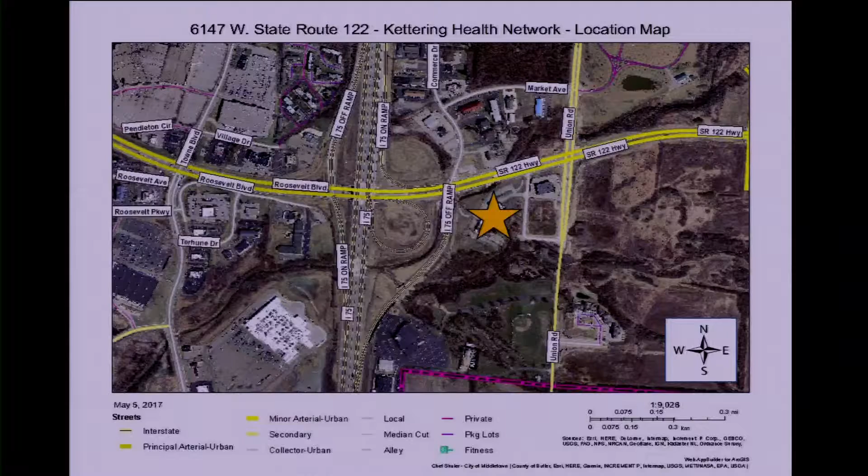Here's a location map. As you can see, the star indicates 6147 West State Route 122. The property, the site we're looking at tonight, is located in close proximity to a CVS, the new BP gas station, the billboard next to the highway, and Interstate I-75 and State Route 122. The property is located in the BCH Business District, surrounded by BCH to the east, again CVS, BCR Business Center Residential to the south, Grace Baptist Church, BCH Business Center to the west, Interstate I-75, and BCI Business Center Interstate to the north. BP gas station, again, is across State Route 122.

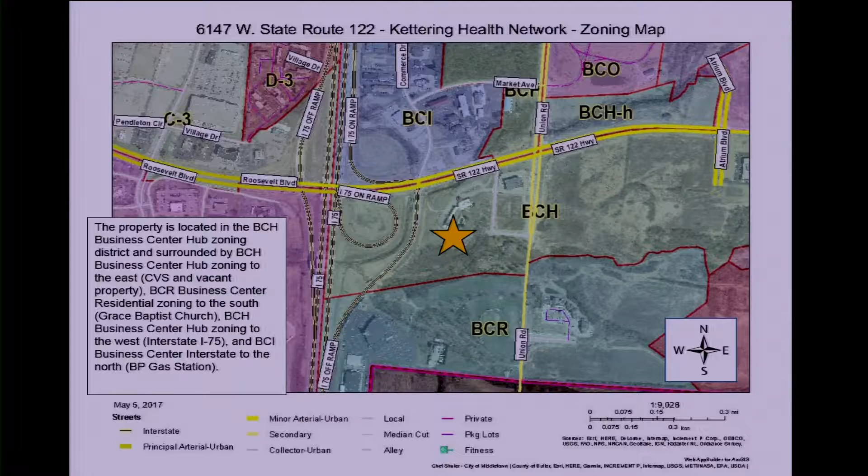Project background: the Kettering Health Network proposes to be up and running by 2018. The applicant is requesting approval of combined preliminary and final development plan. Per the applicant, the development is located on the southeast portion of the property, close to State Route 122 and the I-75 interchange, and requests the following variances due to these reasons.

First, access to the site and the existing CVS store is provided via an existing public road, specifically Union Road and an adjacent service road, and there are no current plans to modify the existing roadways. Second, existing creeks run along the site's northern and southern edges. Dick's Creek is adjacent to State Route 122, and there's another creek that runs along the southern edge. There's significant topography associated with both creeks along with the FEMA-regulated floodplain. As indicated on the development plan, the footprint of this project has been designed so there are no impacts to the existing creeks and associated floodplain.

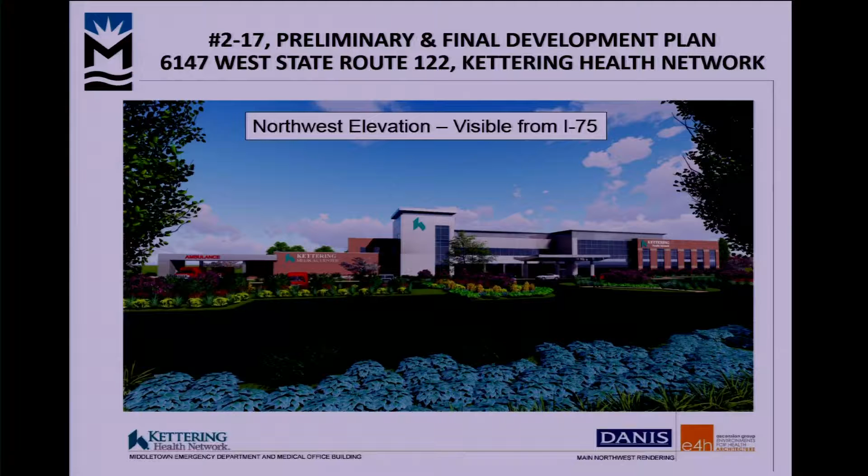Staff analysis: the Kettering Health Network facility proposes a 2-story tall building with a total of 65,000 square feet. The first floor will feature an outpatient emergency department clinic and imaging center, along with a medical office building for physicians. The second floor is planned as a holding place for future growth of the facility.

The plan also proposes a single-story, 300 square foot utility structure, a helipad for evacuation of patients needing higher levels of acute care, and a loading zone behind the building, landscaped by a berm to provide screening from the east.

The proposed use of a health care clinic is principally permitted in the BCH zoning district. Per the planning and zoning ordinance, a clinic is defined as a building used for care, diagnosis, and treatment of sick, ailing, infirm, or injured persons in need of medical or minor surgical attention, but who are not provided with room or board or kept overnight on the premises.

The primary building materials are masonry, glazing, and architectural composite materials. The primary building elevation meets the zoning code requirements for facade transparency and ground floor transparency. The glazing used on the facility will meet the planning and zoning ordinance for 30% transparency.

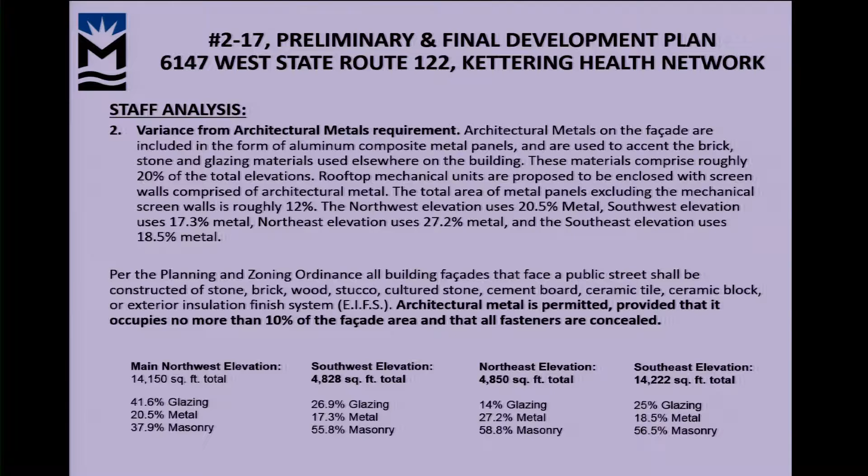Here are the proposed elevations from each side of the building.

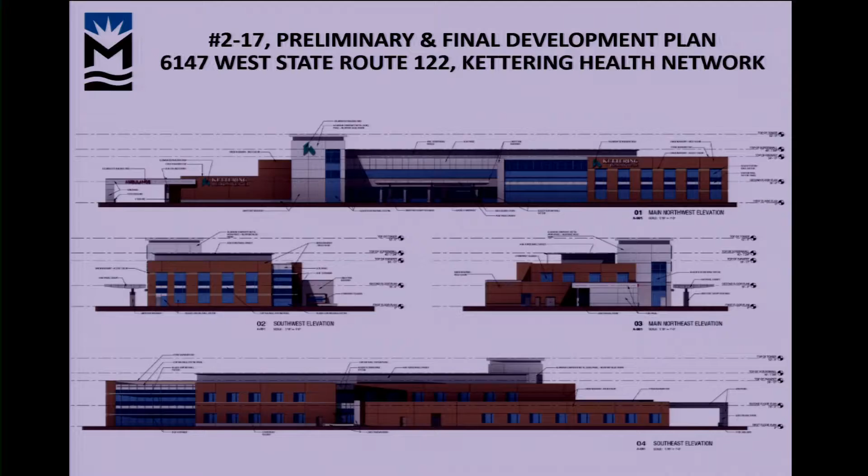Third, sign height and size variance. Due to the proximity of the site to Interstate 75 and State Route 122, and the emergency function of the facility, the applicant is proposing an increase to the allowable number, area, and height of the site signage. There will be 5 signs proposed: 2 ground-mounted signs, one located adjacent to the Kettering Health-owned network along Union Road, which I'll show on a map. They own another parcel that's not part of this proposal. There will also be 2 large highway signs and a ground-mounted sign northeast of the property, which I'll also show. The Planning and Zoning Ordinance for BCH zoning districts allows, for a building of 2 non-residential uses, a maximum permitted area of 40 square feet and a maximum height of 5 feet.

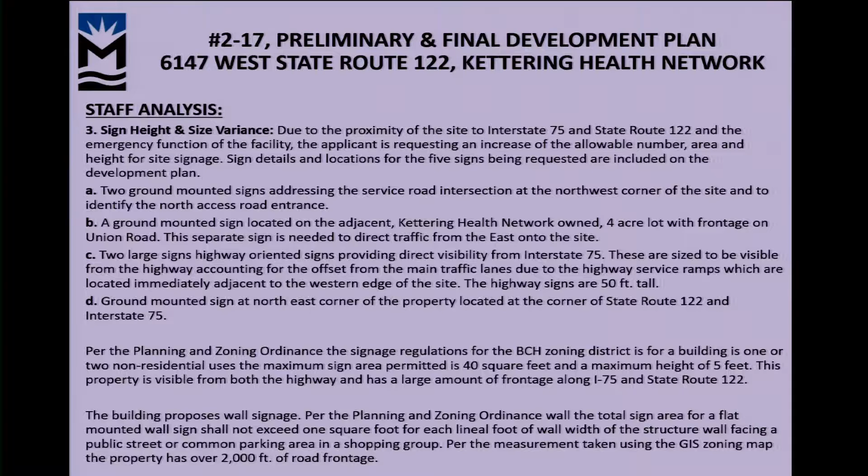This property is substantially visible from both I-75 and State Route 122. The building does propose signage, and per the zoning ordinance, the total shall not exceed 1 square foot per each lineal foot of property facing a public street. Using our GIS map, I calculated over 2,000 feet of road frontage, so they will have more than necessary for their wall signage. Here are the proposed signs.

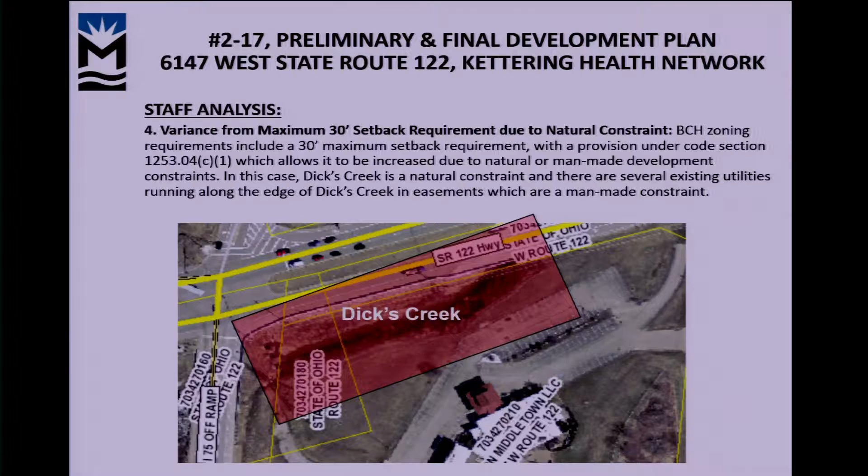Fifth, variance from pedestrian circulation requirements. A, street frontage: a sidewalk or bike path is required along existing public roadway, except for State Route 122. There are no sidewalks planned due to an existing highway project that will be taken under state law. B, greenways: for sites that abut or include portions of Dick's Creek, a continuous 10-foot asphalt multi-use path is required. There are several constraints which restrict them from doing so. The topography and Dick's Creek, and how it runs into the property, would hinder them from being able to build that greenway.

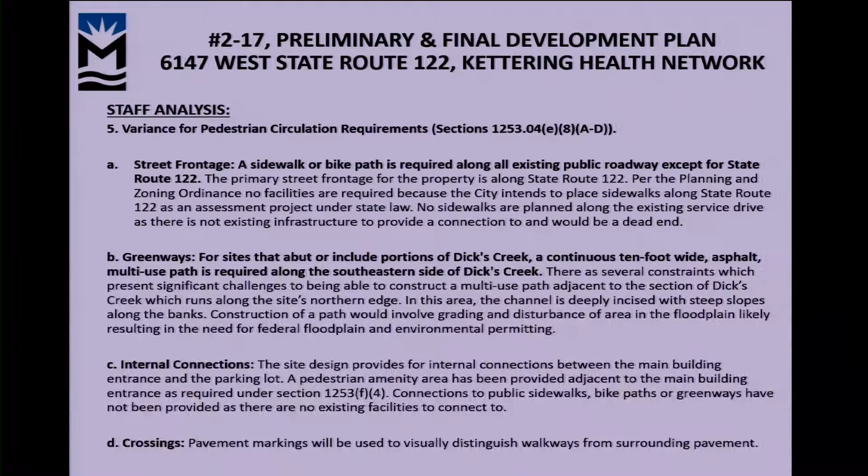Internal connections: the site provides internal connections between the main building, entrance, and the parking lot. A pedestrian amenity area has been provided adjacent to the main building. There can't be connections to existing sidewalks, bike paths, or greenways because no existing facilities exist to connect to. Crossings: the pavement markings will be visually distinguished from the surrounding pavement on the plans.

This is just talking about the plan now. This is not a variance requested.

Pedestrian amenities: the planning and zoning ordinance requires pedestrian amenities of at least 1 square foot per off-street parking space. Pedestrian amenities include outdoor pedestrian plazas with benches, outdoor dining, outdoor playground areas, water features, clock towers, public art, or similar outdoor features. These amenities should be placed in front of a building, near the public sidewalk, or near building entrances. These are close-ups taken from the plans proposed that feature those public amenities.

The development plan proposes outdoor seating areas for employees, visitors, and patients. The total amount of pedestrian amenities required is 200 square feet, and they are proposing 347 square feet.

Parking: the total amount of parking spaces required for the project is 195 spaces. For the plans submitted, they propose 198, which exceeds our requirement by 3 spaces.

Landscaping: per the planning and zoning ordinance, in order to enhance and soften the appearance of buildings, at least 50% of the area within 10 feet of the principal building shall consist of planted areas containing a combination of trees, grass, flowers, shrubs, and other ground cover.

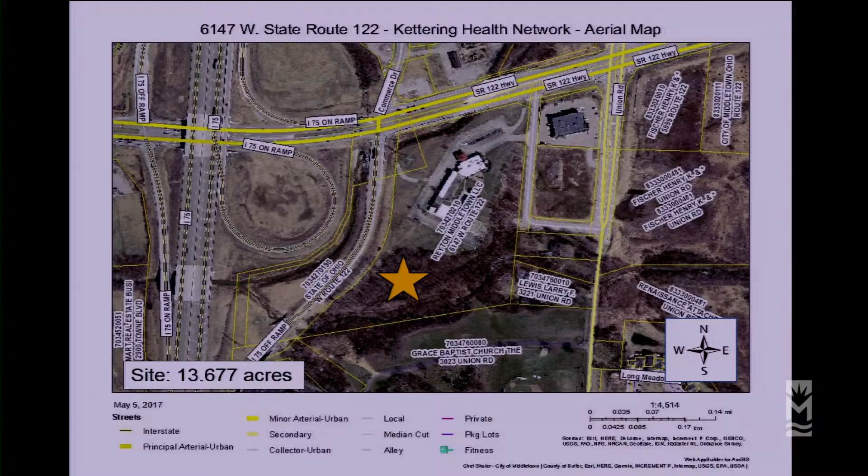To follow up on that question and the internal connections, are there any connections planned across to where the CVS is, or is that also a topographical issue? The site plan that showed the sidewalks didn't seem to show any connections. Go back.

We don't have any plans at this time to connect to the CVS property. I did note that the engineering report stated that there were sidewalks along the CVS property. I wasn't aware of that, and I didn't think that there were, but if they say that, then maybe they know better than I.

And did staff say that there will be sidewalks along 122 as part of a state project? Part of another program. Will they be connecting to that at some point in the future, or be required to? They would be required to in the future, if those plans do happen.

Would it make sense to put a crosswalk between the area where the helipad is and CVS, because people coming in and out of there could walk across to get medication? If you look at the entrance just north of the helipad, something in that area could be a crosswalk to get across to that CVS.

It's possible. I don't know that I would necessarily want to encourage people to walk in that direction, but it is possible if that's what we're required to do. I'm thinking our demographic may require one.

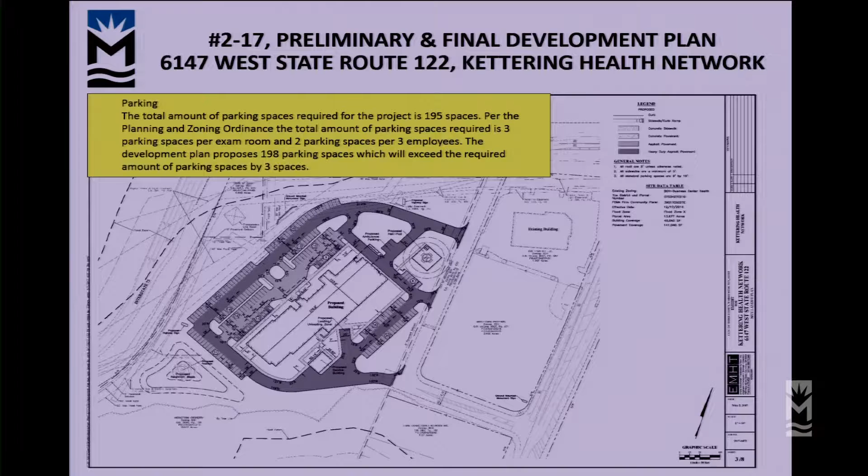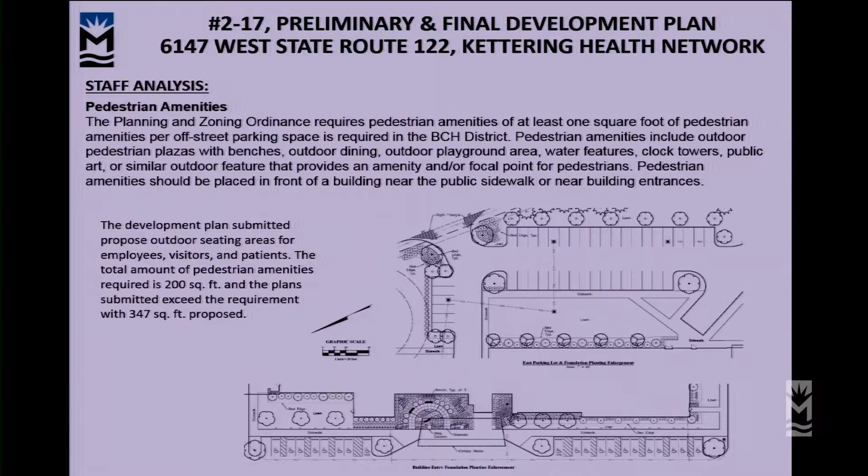Any other questions of Mr. Durham? No? Okay, thank you very much. Is there anyone else who would like to come forward and speak in support of this application? Seeing none, is there anyone who would wish to come forward and speak in opposition?

Good evening. Please state your name and address. Robert Curry, 10050 Innovation Drive, Miamisburg. Will you promise to tell the truth, the whole truth? I do, thank you.

My name is Bob Curry. I'm an attorney representing Atrium Medical Center. We have both some concerns as well as some objections relating to what's being proposed. Starting with the concerns, one is simply that this, of course, is a clinic, which means it is not supposed to have overnight accommodations. There's no objection to the office portion of it, but the concern relates to the second floor.

That's future speculative space. What is that supposed to be? This application is for a combination of clinic and office. We don't want to see that left open in a way that it could be expanded to hospital use. That would be contrary to your comprehensive plan, and we'd ask that you guard against that.

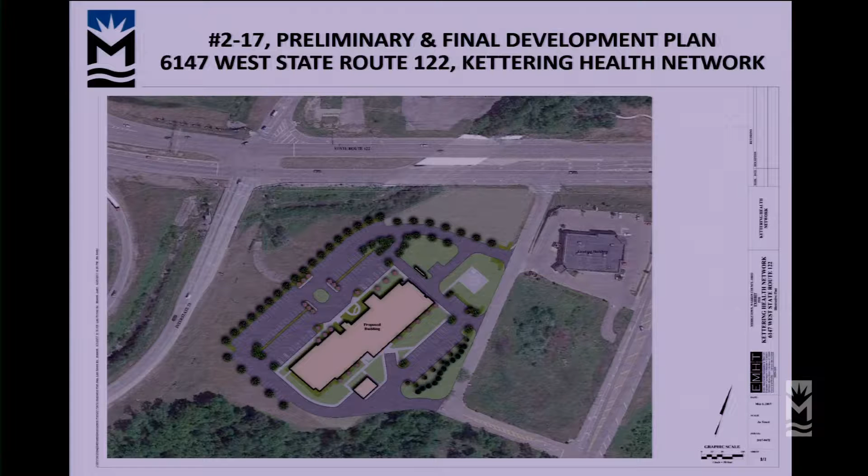Next, there are a couple of variances relating to the building design, as far as the maximum square footage, or maximum amount of architectural metal at 10%, and also the vertical elements every 30 feet versus 60 feet as requested. There's no exceptional circumstances that would say that this qualifies for a variance.

I'm well aware of what the standards are for a variance, and convenience is not one of those. Massing is not an exception in your code. It's simply a requirement, and there's no relief unless there's exceptional undue hardship or exceptional circumstances, which on the building design there aren't.

On the signage, what is being requested here is to basically throw out the zoning code and put in the applicant's desire for the greatest highway visibility they can get. It's a complete wish list of, if we want maximum highway visibility, this is what we'd like to have. So they're asking you to completely ignore the zoning code, which allows a very limited amount of ground-mounted signage, and just on the basis that it's on the corner, on the interstate, allow them to put in a massive amount of signage and ignore the zoning code.

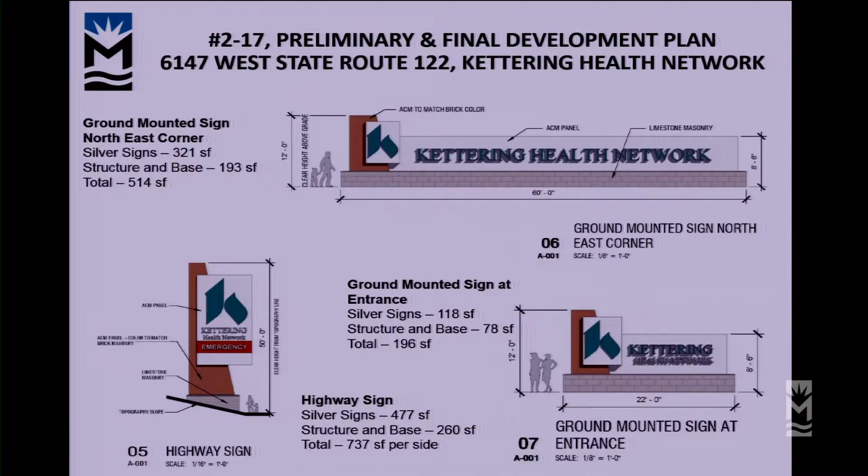I don't know that you can see the sign at the top if you're exiting from the south on 75. To be honest, I don't know if you can see the 50-foot sign if you're going southbound 75—you're not going to see it till you get underneath. If you're going north on 75, coming south is no problem. I don't think you'll see the smaller signs at all. Going by memory.

Any other questions or comments before we get the staff recommendation? Can we get the staff recommendation, please?

Staff recommendation: staff has worked very closely with Kettering Health Network applicants with the submission of this development plan. The property is unique and has a large amount of road frontage, along I-75 and State Route 122. Staff believes this project will be a great addition to the east end. Staff recommends approval for a combined preliminary and final development plan with the approval of the following variances: 1, a variance from horizontal scale requirement of 30 feet; 2, a variance from architectural metal requirement; 3, a variance for sign height and size; 4, a variance from 30-foot setback requirement due to natural constraints; 5, a variance for pedestrian circulation requirements.

Before I call for a motion, I just want to encourage the board, since I can't make a motion, to strongly consider the question of pedestrian access. The issue of future access should development occur should be part of the motion.

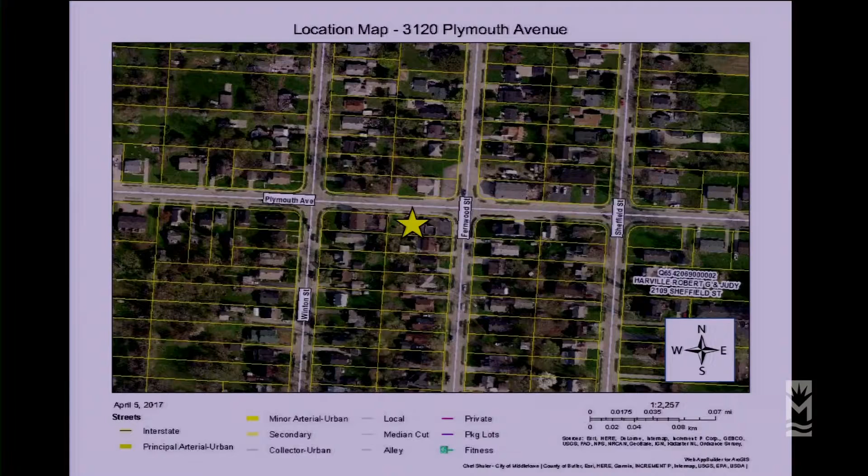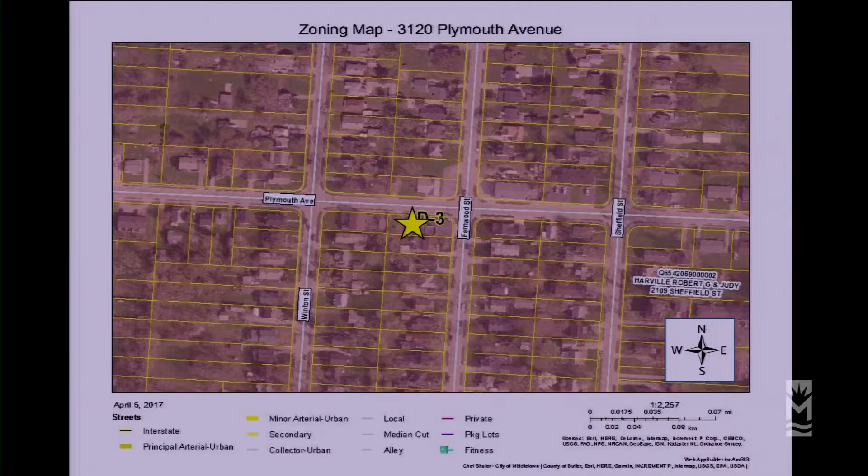A location map. It's in the heart of a residential neighborhood. You can see that by the property itself being zoned D3 residential, as well as all of the property you can see on this map. An aerial of the property, again, it's located at the intersection of Plymouth Avenue and Fernwood Street.

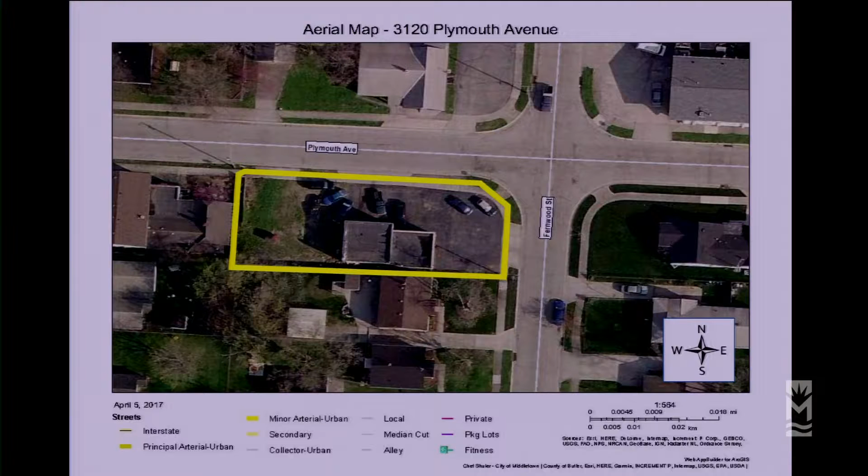Property background, currently there is a car repair business operating on the property without an approved building department permit, as well as planning and zoning department permit. An application was submitted and denied for a car repair business in August 2016 for the property due to a prior use adjustment being approved. Specifically, approval was only for motorcycle sales. This property has formerly had auto repair businesses known as BA Automotive and Assured Automotive.

In May 1996, the Planning Commission approved a use adjustment for the expansion of an existing automotive repair business. The expansion never happened. However, it was granted subject to the following conditions: no outside repair work, and repair work limited to normal business hours.

In October 2014, the current property owner submitted a use adjustment application requesting the existing building on the property be approved for used car and motorcycle sales. The Planning Commission heard the case and found that there were concerns regarding the potential noise levels and traffic generated by the business that could affect the surrounding residential neighborhood. The Planning Commission approved the use adjustment with several conditions.

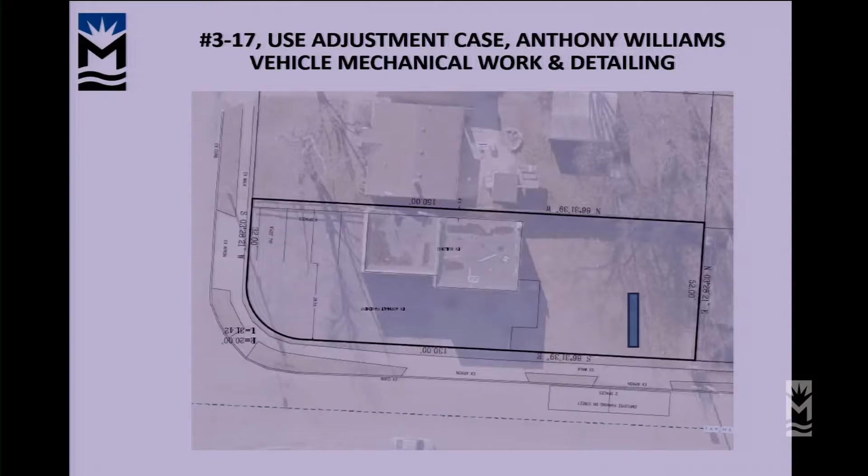What was submitted to us by the applicant was just the proposal of striping the 4 spots that you see on your screen. Myself and Jeff reached out to Josh with Apex and asked him, hey, if they paved that lot, how many parking spots additionally could they get? Because we had discussed that before, we were all here. And Josh at Apex said if this were paved, it would add an additional 6 spaces. Well, it looks like they resurfaced the lot and striped it already.

That doesn't comply with that plan. Right, yeah, they just put some stripes down. That was before they worked with Apex, to my knowledge.

And is there actually a curb cut leading into that? That was my potential next question, where they have the 2 parking spaces. Yes, there's a curb cut here, where the 2 proposed parking spaces are. So curb cut here, here, and you will park in front of a curb cut? Is that the access they've proposed? Staff would not recommend approval for parking there, any access would be only for staff cars to the future proposed paved lot. We would want those staff cars up here.

Why is there even an apron there? There's no, that's the unpaved part, isn't it? Am I looking at a house there, probably? Probably a house there at some point. So there was a driveway that was just taken out, probably. Right, it's existing. And for the longest time, as history pictures showed, there was a lot of gravel in there that used that drive apron, but it's since just grown in primarily with grass.

And if paving was going to be put in there, would any sort of runoff study have to be done before paving requirements, city engineer? Is it based on square footage? So if it exceeded 7,500 square feet, it would require it. I'm trying to calculate how many feet that would be. Is that close to that or no? I wouldn't think so. Give me a second, I can make a quick calculation.

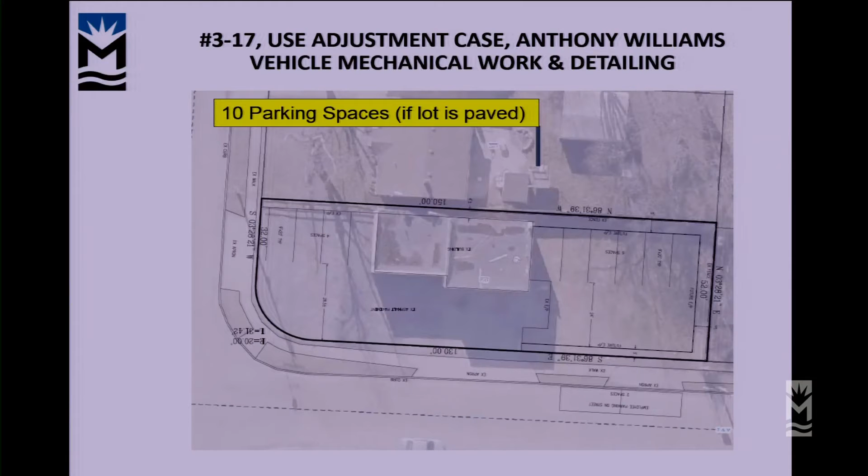I don't know, from my point of view, we have 3 employees, 3 employee parking spots are sufficient. I'd like to keep the number of cars down to 8 on the lot and 2 in the bays, no more than 10 on site, maximum. That's even maybe a little bit more than I was thinking.

So staff is recommending and requiring that they pave that grassy area, if that is something you're willing to do? Okay, they're willing to do it, we could recommend that it be paved. So the detailing spot is included in the 8 spaces, still 1 space. And I would also expect that the 3 employee spots be marked as employee spots too, just so it's clear to customers that those are employee parking areas.

Okay, we've heard staff's recommendation, and we've had some follow-up discussion. Do we have a motion? No, there wasn't a recommendation. That was my recommendation, that's right.

Did you want to change anything regarding the numbers? Staff's recommendation, I believe, was up to a maximum of 12, and so I would request that number be reduced to, let me calculate here, a total of 10, where there would be 3 employee spots, 5 customer lot spots, and up to 2 additional in the bay, but all parking to be done within marked spaces.